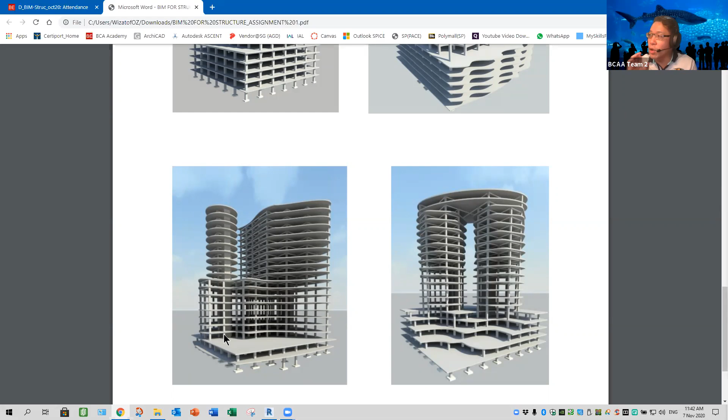Okay, like for this building itself, you can see that some might use the lift well or the lift core as a support for the structure. So you might need to think about this. So a lift wall itself could be RC wall all the way. So they need not have a column. So the wall can be thicker. So it depends. Take note what's the loading. So design-wise, you need to understand when to use RC, when to use a column, when to use this. It depends on the needs.

For this, I think there's not much. Just in between here, this is the lift wall. All right. Same thing. The darker area normally should be the lift wall. So if you are designing a column this way, you can see there's a platform, but nothing much there. I think there's also a number of openings. Yeah, because of the shadow.

Okay, so what should be our wall? 1 meter opening means this opening is a 1 meter structural opening. That means for a passenger lift, the minimum opening is 900. So they only give 50 mm allowance. All right. So 4 meter width, that means this is clear 2 meter, 2 meter, or it could be externally 2 meter.

Now here I will show how you're going to design this based on the drawing we have. So let's take a look. Okay, let's see where we can do this. 2 meter depth. All these dimensions should be the clear. So the wall is, create core wall 250. Yeah, so this is 250 thickness, right? Yes, okay, 250 thickness concrete wall. So it's RC wall all the way. So you can see that it partially takes support, full thickness.

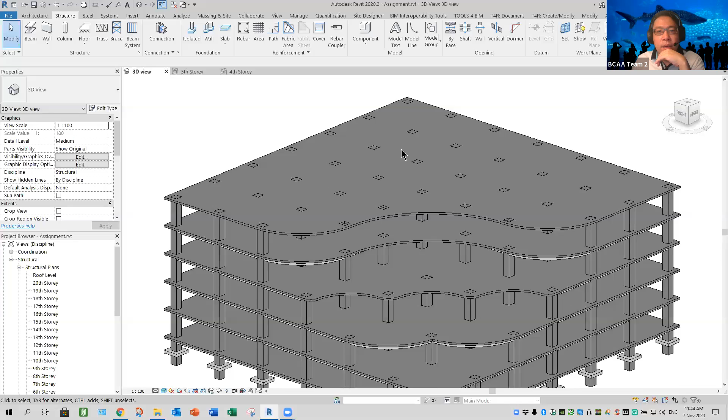Okay, so for this case, for my building, I might have 2 lifts here and 2 lifts here, all the way up the building. Of course, you need to plan what the design outcome is. You might not want to follow this shape, maybe at the ending part here. All right, I might do some adjustment later on.

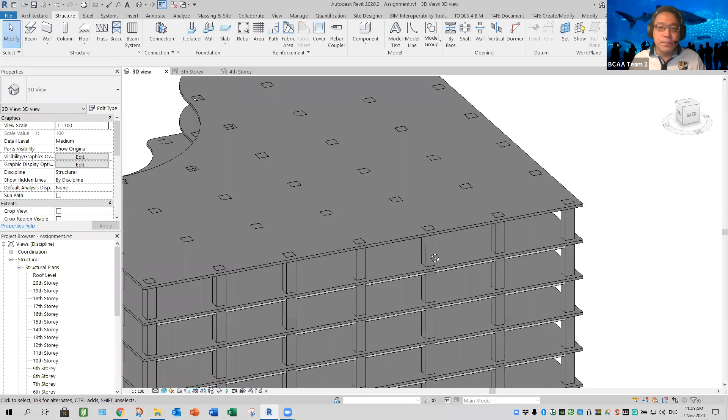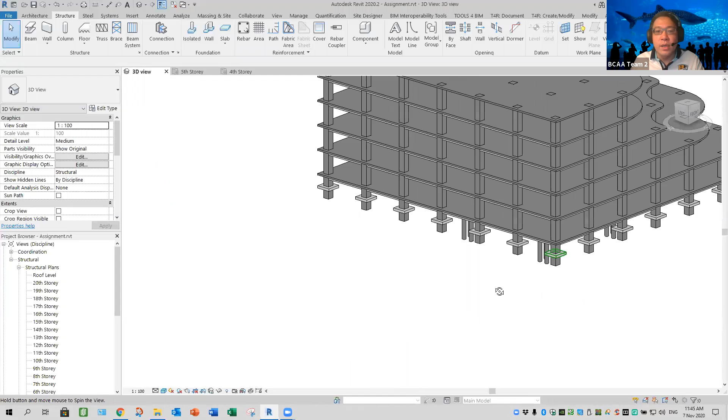So, let's say this is the front of my building, the main design. It means this profile here, you are showing something to people. Wow, nice building. So there might be a car park somewhere because we don't have a building here. So most likely there might be a goods lift somewhere here that travels from the first floor to the 20th.

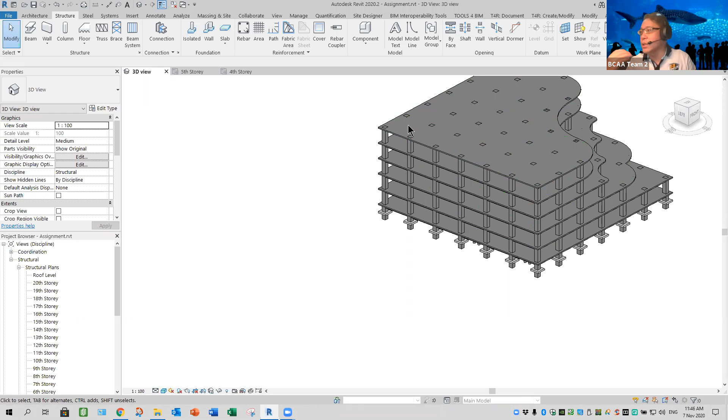Because in offices you've got to move your furniture, move your goods. So you can actually have one goods lift hidden somewhere with an opening, because normally these things are not so nice. They'll conceal or hide it somewhere. So you guys have to think how to design. Ideally, you should have the model come up first, then you start to plan where to place the lifts and so on. Meantime, I just want to create the lift, maybe also used as a goods lift for the podium here. So let's go to the first story.

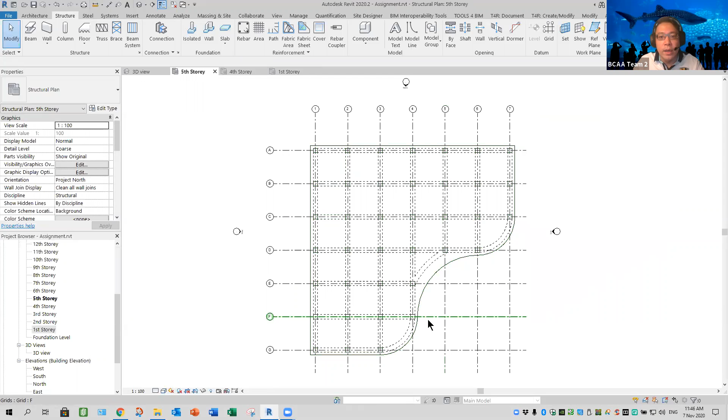Yeah. Okay. On the first story you might not see which direction. If I go to the fifth story, I roughly know where I am now. Ideally it's the sixth floor, which is the actual one. Okay. So I haven't changed anything yet. So my passenger lift or goods lift, maybe meantime I want it to be here.

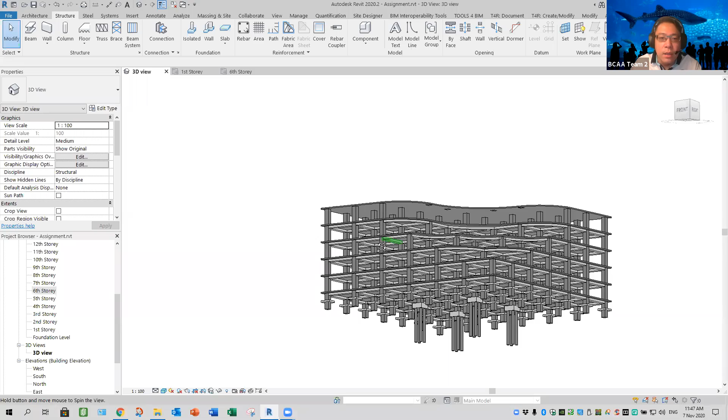Okay. So let's see, because we have 20 floors. What is our opening here? The so-called spaces here. Sixth floor, I don't see the beam underneath. Hold on. How come there's no beam? Haven't created it. Okay. Let me copy some beams from the fifth floor. Okay. Maybe how? Let me see. Nah, not like that.

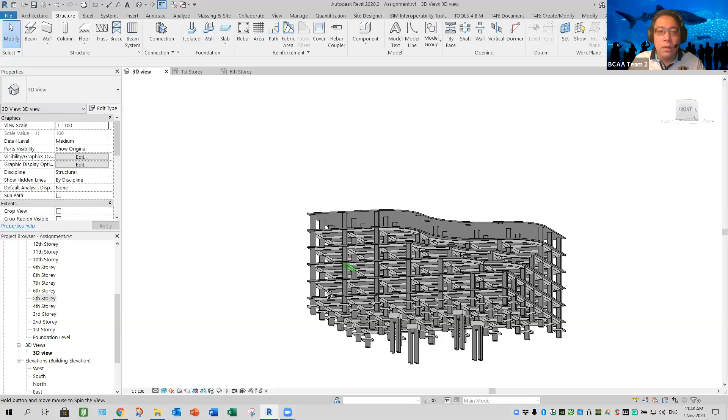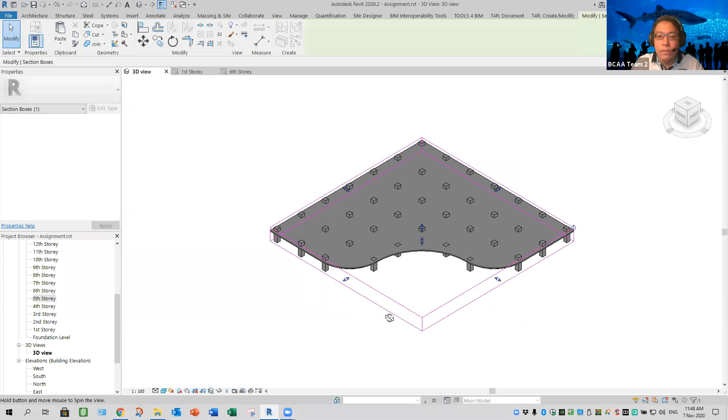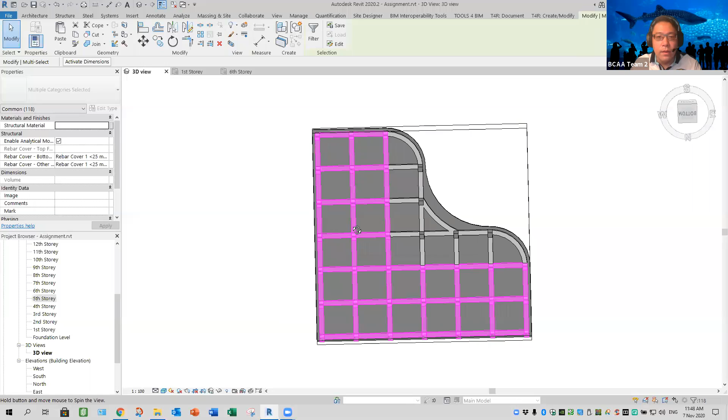Right click, orient to view, 5th story. Okay, like this. Okay, maybe something here. Control key, something here. Right? Then I need to unselect my column. I just want the beam. So copy, paste to 6th floor.

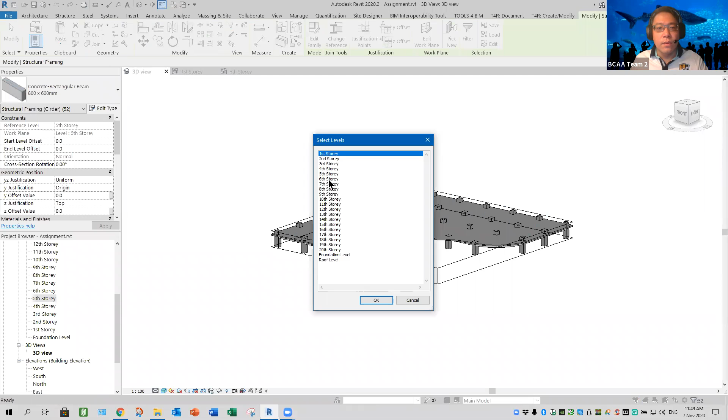Okay, it should be up there now. Clear my section box. You should have a beam on top now. Yep. So later I'll design this adjustment. Okay. So I have the 6th floor with beam. So let's go to 6th floor. Okay. I think we have our opening. Let's see.

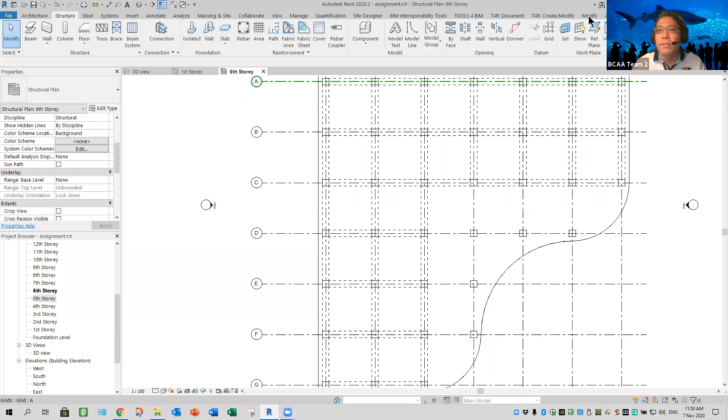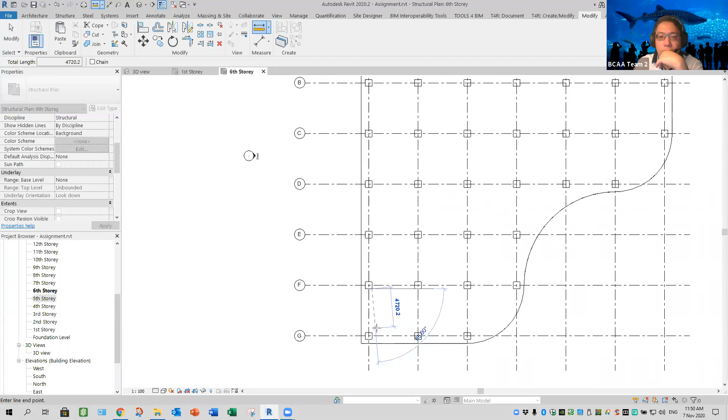Distance measurement modified. They want the opening 4 meters. So this one, we need to have 4 meters. We have 4.72. So big enough. Yeah, good. We need to have a staircase. So this is the staircase. This is my lift area.

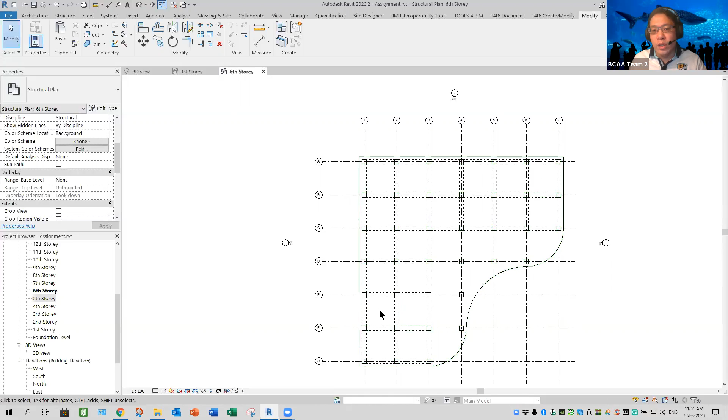Okay. Yeah. Staircases are normally at exits. So you should have one staircase here, one staircase here, one staircase here for emergency exit, let's say based on my design. So normally staircase and lift are quite close to one another, side by side. So I will build my passenger lift, maybe one passenger lift with, yeah, that one's up to you guys. This is just the building I'm planning. So let's do the opening first. I might change anytime because my whole building is not created yet.

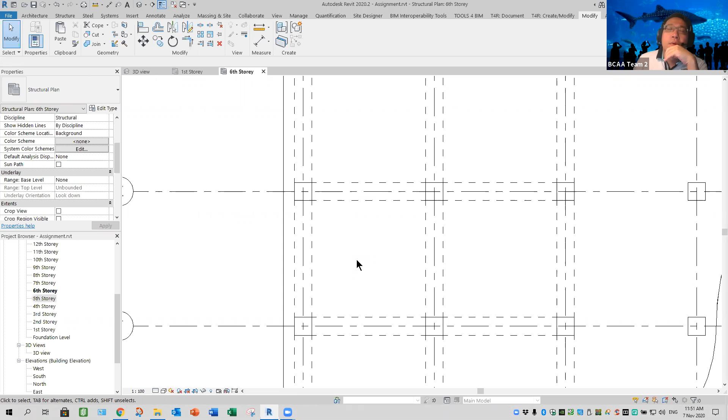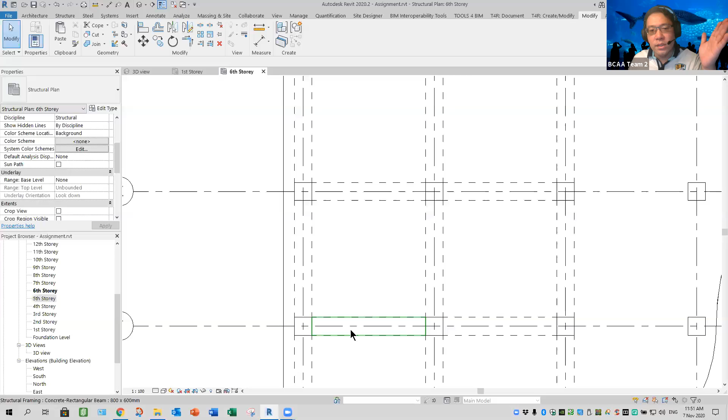Okay, they want 4 meters by 2 meters. So if your lift orientation is facing up this way, the lift core is important. That means my wall needs to be here, not just this. Ideally, it's flush. Why? If you draw your wall inside here, there will be air turbulence when the lift goes up and down. So ideally, you need to draw your structural wall sitting onto your beam.

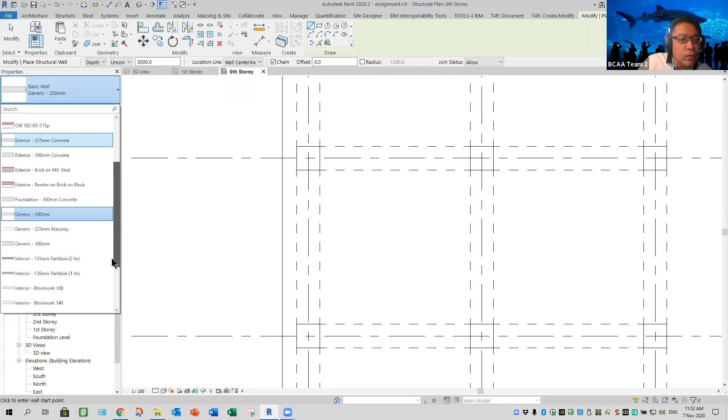Now, ready? If okay, I will start from the 6th floor. So I go to structural wall, and the wall thickness is 250. So let's see, do we have structural wall 250? I think we only have 200. Okay, so let's duplicate. So edit type, duplicate. Just call it structure wall, STR wall 250 mm, something like that. Yeah. Okay. So pick okay.

It's still interior function. It isn't exposed unless you want to set it as exterior, which is near the outside. Okay. Exterior structure, change this to 250. Yep. And okay.

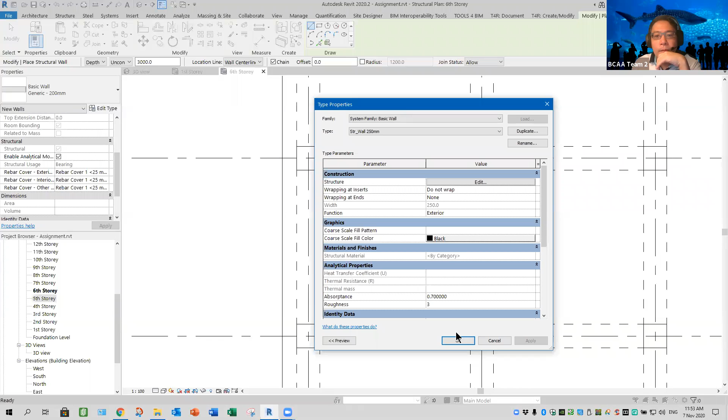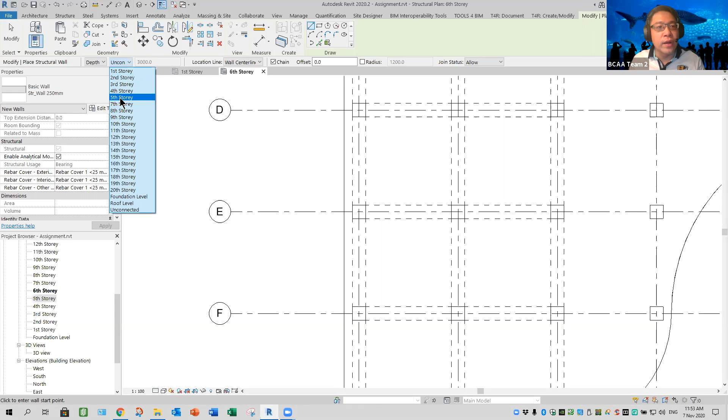Now, I'm going to draw on this. All right. Remember, structure wall: if you are at level 6, you are drawing it downward to level 5. I can see from here, it says that, right? So connected to 5, then we need not worry about the height. So click level 5, it clears. Now here, I don't want it to be at the center. It should be at the corner. That means core face exterior or core face interior.

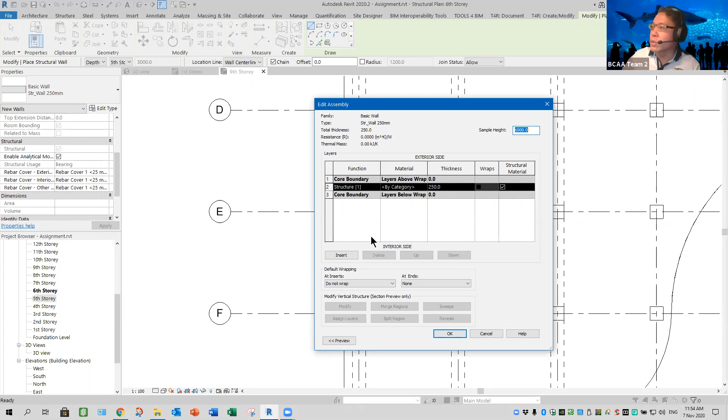When you learn architectural wall and structural wall, right, you go to edit type. You'll notice that if you do design, this is the exterior side, this is the interior side. So when you draw an architectural building, interior wall means your plain, thinner plaster. Outside, thicker plaster, thicker painting, because it's exposed to nature, exterior, rain, all these things. So a lot of different coating is there, weatherproof paint and so on.

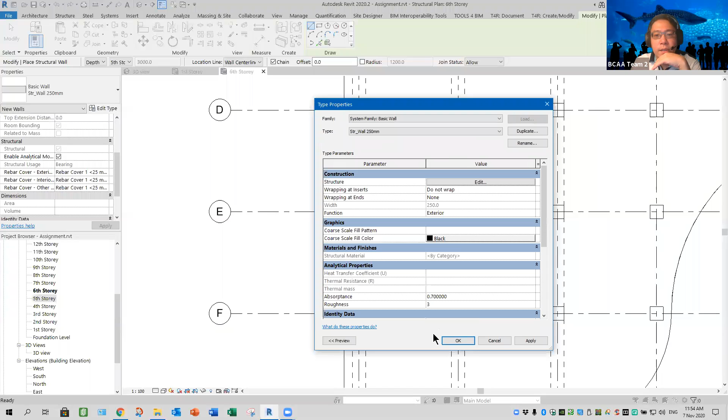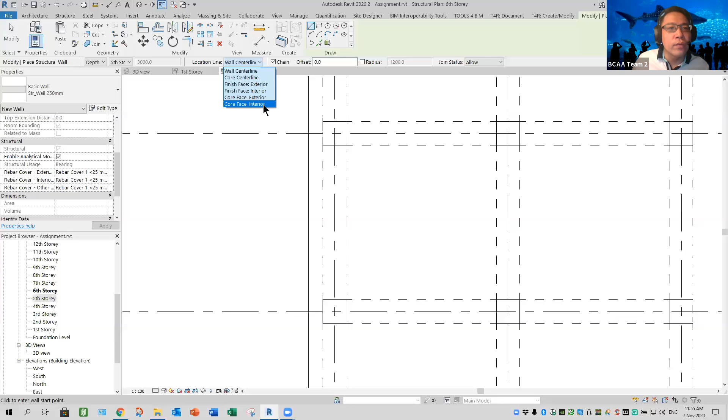So that's why you've got to understand. All right, but this is still structure, so everything is still raw finish. So I don't really care much about them yet. Okay, so select this. Then I'm going to draw this wall. Okay, everything set up. This wall, one. Oops, center, I don't want. Wall, core face interior. Yeah, like that. One here, then one here, and one here. Now I temporarily draw first because I need to check and see what the design is like.

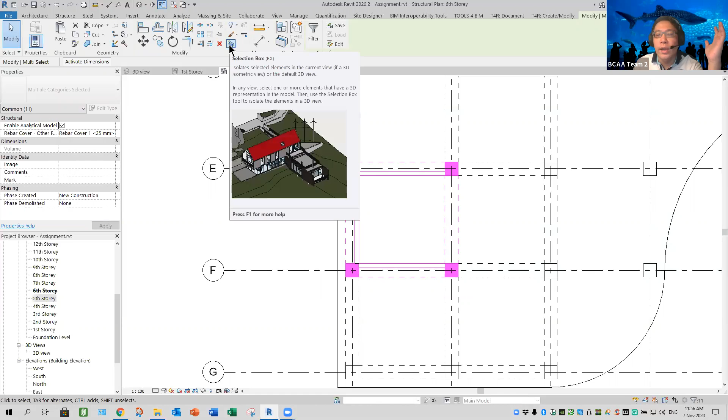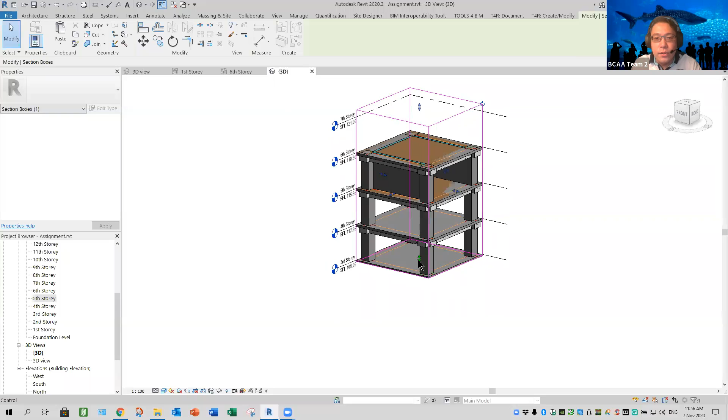So modify. Now, by drawing this, it's quite difficult to check again. So as I said before, right, you window what needs to be selected to be shown. Go to your selection box. It'll show you the 3D view now like this. So from here, at least this is cleaner in the sense that you know where you are cutting, where you are punching the hole. So the focus is only on that area. So it's good to have it up to here, basement.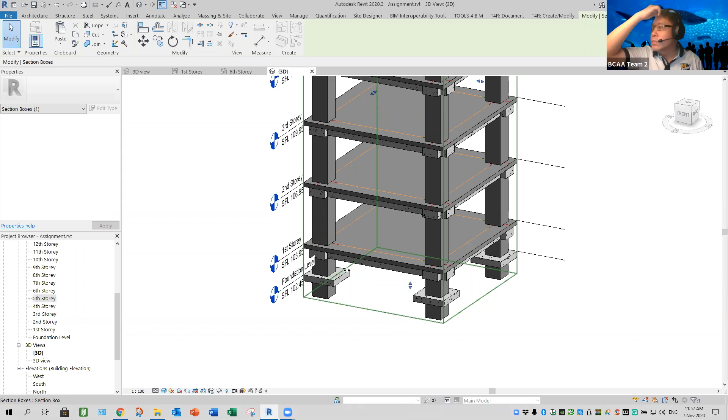Now, basement is important in a way that if you have a high-rise building, normally details like your structural pit here, how deep further down, you need to base on the lift specialist requirement, because that's what's called the lift pit. You need to put a buffer. Normally for high-speed passenger lifts it's an oil buffer, hydraulic. The rest is like hydraulic, but it's air. Normally you have one, two or four, depending on the loading. So it stops the lift when it's going down, so you don't crash. So lifts have a lot of safety features.

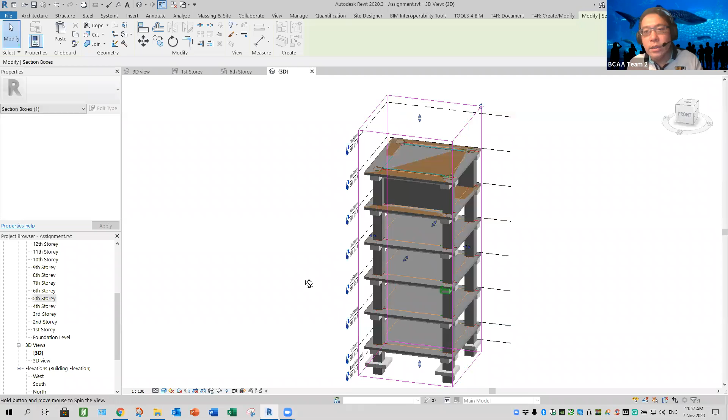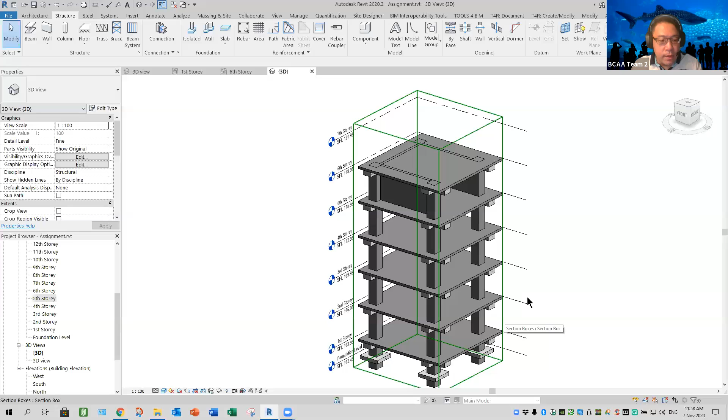So I want to see my building like this. So your view should be something like that. Okay, slight adjustment. Important thing is it's clear of your building, easier. So when I do design work, I like to view my model this way. You see all these flashing things because, as I mentioned in the first lesson, the analytical line is shown. Off it, your graphics will look better. But some of them you may want to cut in first to show something. Okay, closer. I need to clarify this.

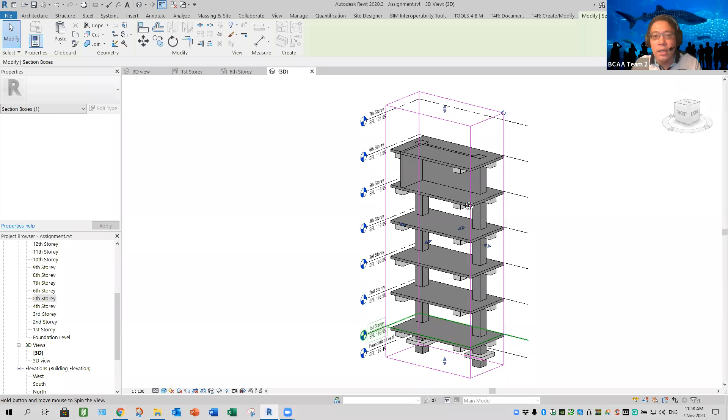So change your shading mode, not to shaded, to consistent colors. So you can see the color here. See, there's no line, meaning your wall and your beam are overlapping, which should not be. When you do structure, you see I have a line here, and I should have a line here. Here I have, or don't have.

All right? Yes, Hui Hao, want to say something? No, no, no.

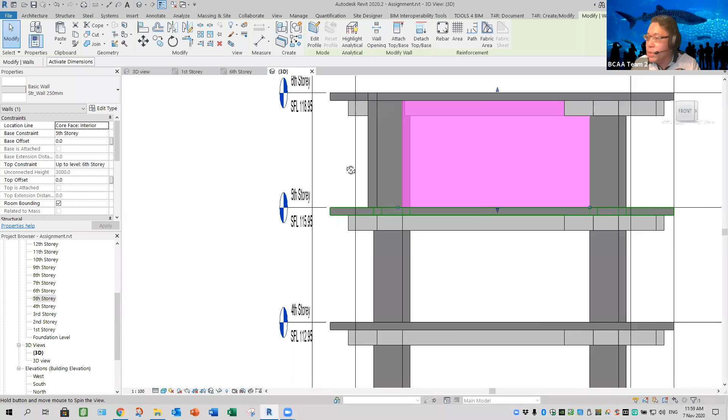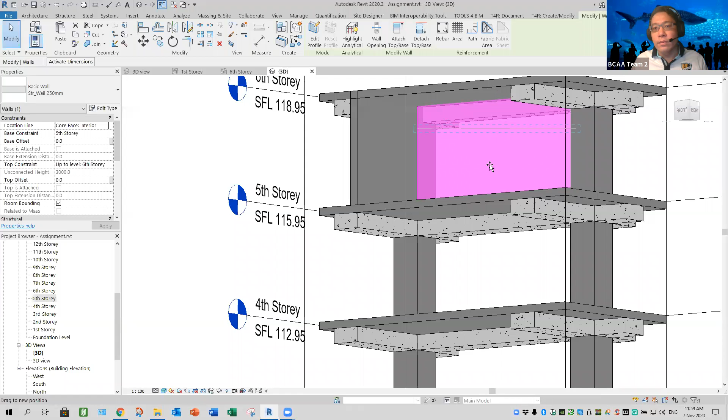Oh, okay. So when you select your wall, you see that my wall is overlapping my beam, when my wall should be below the beam. And you see that this is a structural wall. When you overlap, they automatically merge into your beam. See that? Which is wrong. Logically, the wall should be underneath the beam, not joined together. So what is this height here? Very simple. You drag downward. You see the beam will restore back. And from here, you can drag this, fidget until it touches the underside. This is one method. If you don't touch, observe the color.

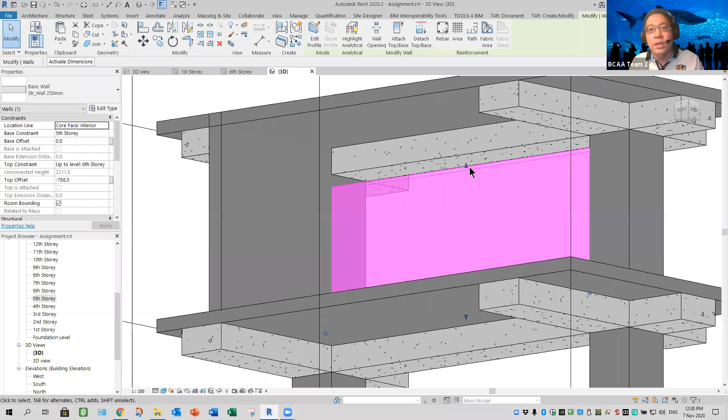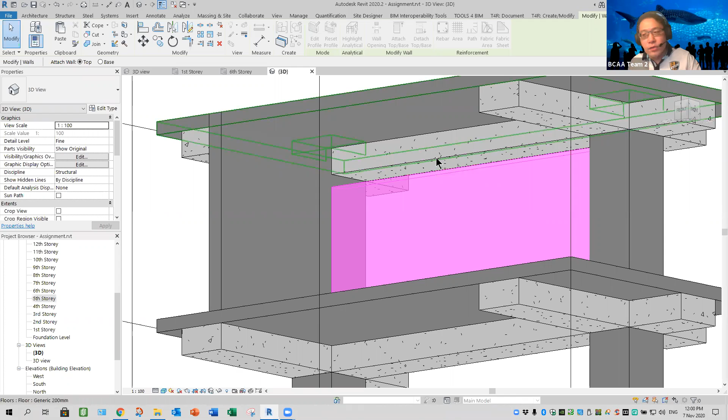The other method, yes, you can try, but I don't know whether it works or not. Let me try, because so far I never used the attach tools. See, attach. Can I select the beam? It doesn't. Instead, it's a slab. See, cannot. Okay, this is for those major parts. So beam is not.

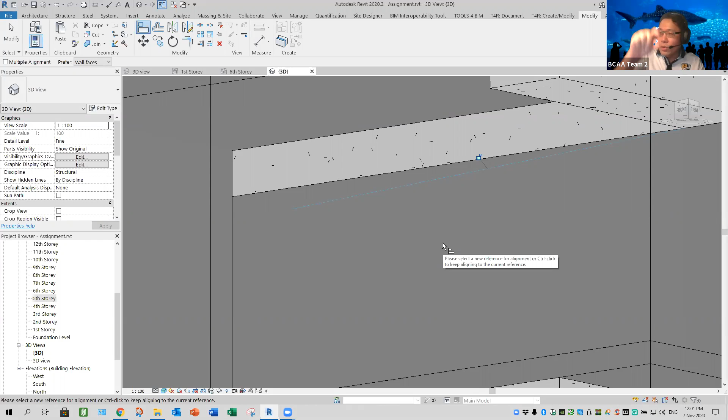So for this case, you want to use align, where this is your reference. You zoom in, reference the face, remember. So when you highlight, make sure you highlight the correct face. See, the underside of the beam and this slab here. See now, it works. So if you don't want to use align, there's an arrow, you fidget until it touches the underside of your beam, you highlight, let go. So two ways. Safer, you can use alignment. You won't go wrong. So this is correct now.

Outside here, I think, should be okay. But it doesn't show the connection line. Why? There's a reason. You learn Revit Archi, your wall has a connecting joint, which is allowed. When two walls are together side by side, they do the cleanup.

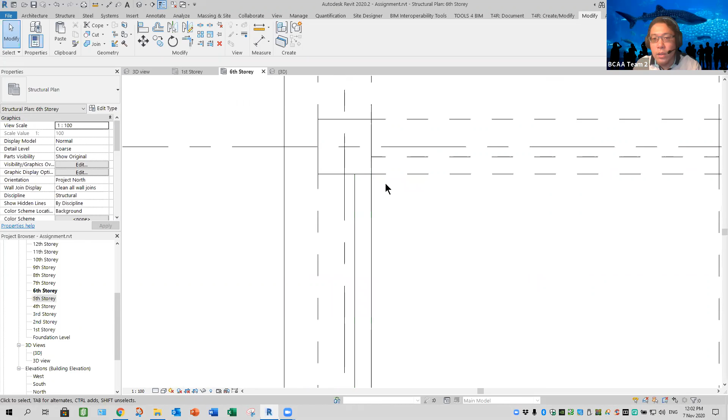See, now if you draw correctly, it should be a hidden line because it's on the 5th story, but here it's not. And you can see that my wall is overlapping. See that? That's why you don't see the connecting line. So for this particular design, you need to select your wall and, remember, point at the grip, right click. I want you guys to select disallow join.

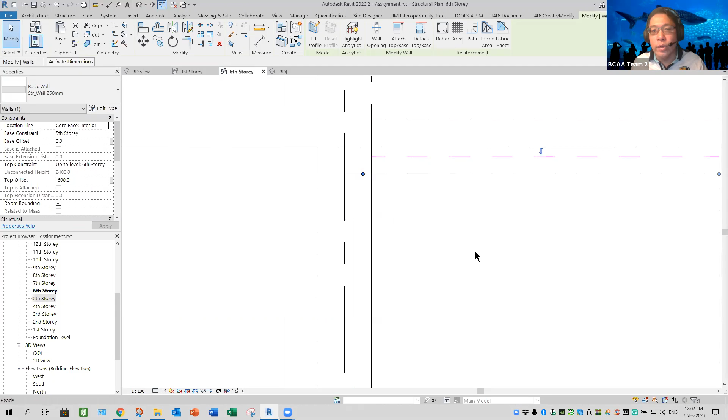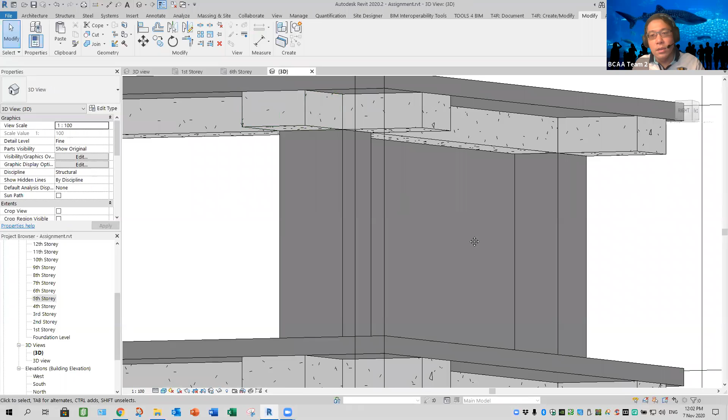Once you do that, you notice that your wall, you can adjust the connection properly, and you go to your 3D now, you should be able to see the clear line because of the auto cleanup in the wall function. Although yes, it might not be an archi wall, it's a structural wall, but the feature is still there.

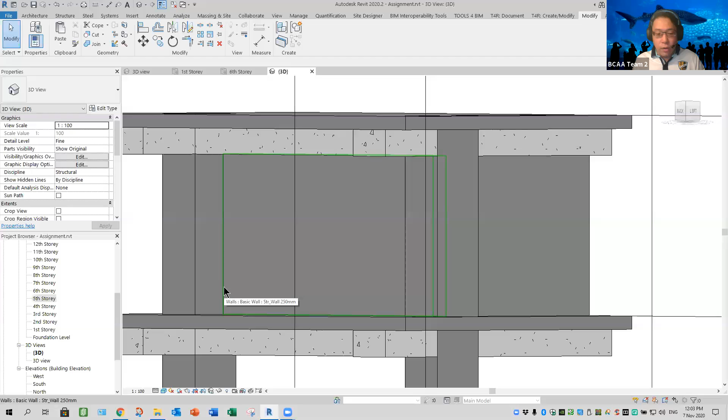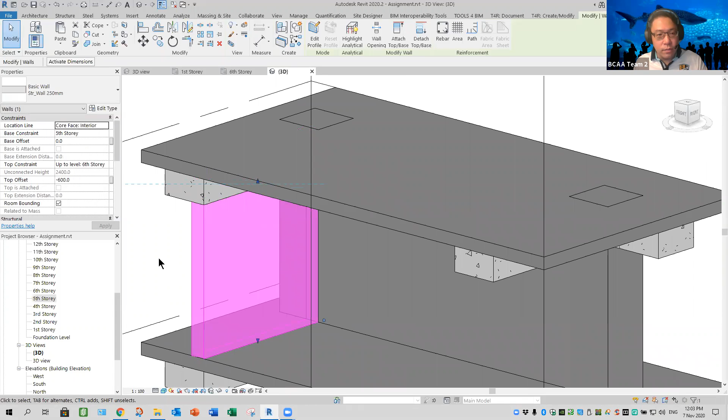So when you do modeling, especially construction, all lines must display, meaning it shows the joint stops there. Not like just now, one glance can tell that it's overlapping. So you need to change the behavior. See this? Same thing for this particular wall. Drag further down. See, it touches. See my beam? The green color, let go. See? Automatically now. All the lines are clearly shown.

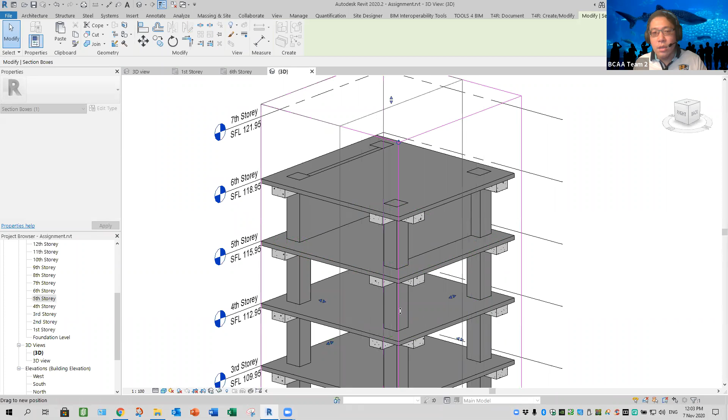So this part is done already. Let's adjust the other side. Do your structure, don't rush. Make sure it's nicely, properly set up, then slowly do the other side. Because if you want accuracy, we need to take care that the model is done nicely. So this one joins okay, right? But this one, see the joint? Only archi wall design is nice like that, but not structure. So here, outside is okay, inside is not.

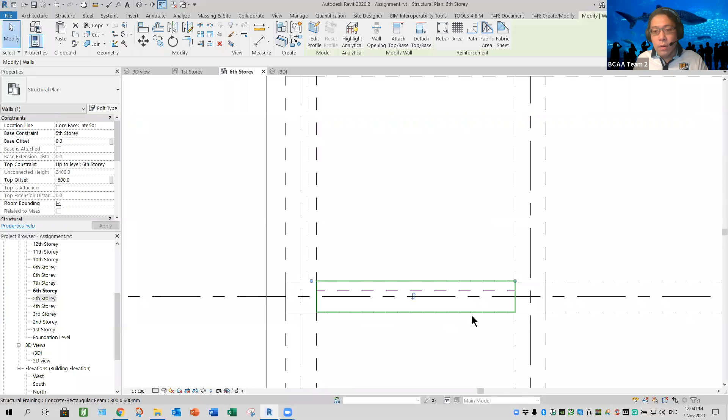Okay, so select, use the shape handle, adjust. See the green color beam line, let go. So you guys have got to be observant. But here it still shows the join, right? Which I don't want to let join. So how? Go back to my 6th floor. Select the wall. Oops, hold on. The wall. See, this still joins. Point, right click. See, disallow join.

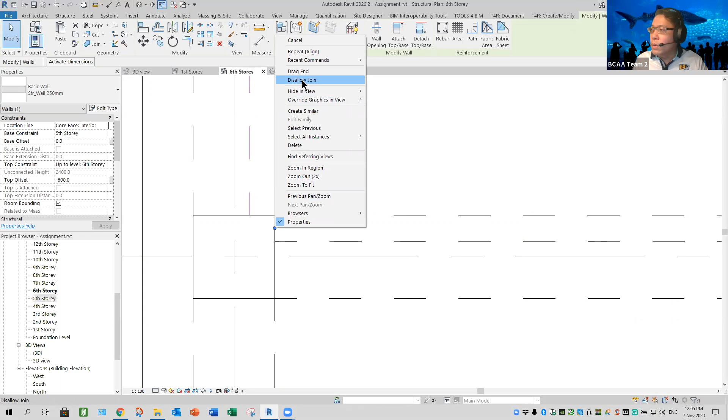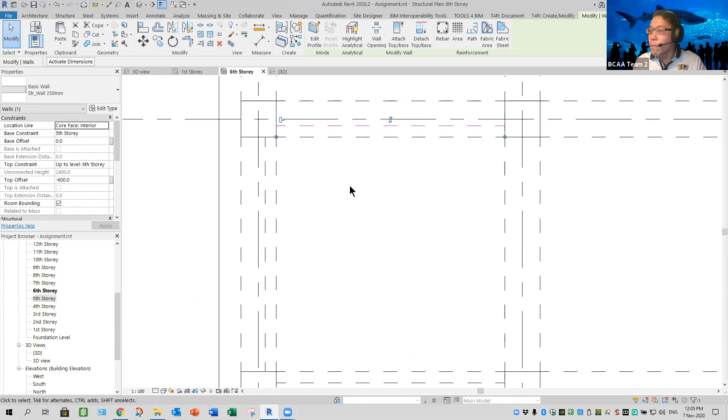Select, drag it. Because when some extra component appears, the volume will be wrong, because your QS needs to calculate how much cement is used if you do costing. So as a modeler, you've got to be careful when you do design like that. You need to understand every component you draw, anything connected or extra.

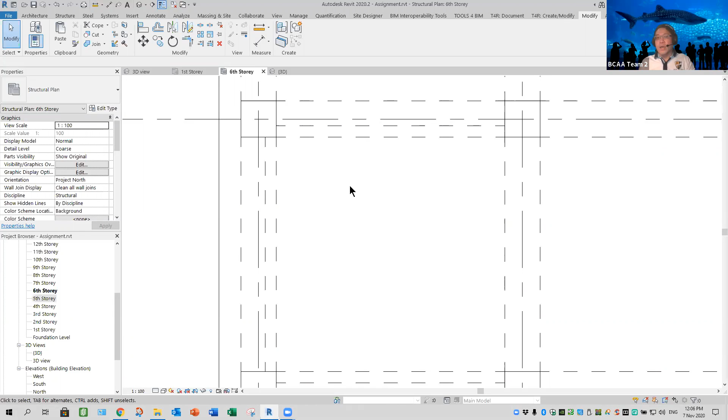Because as I said before, the very first day, when you do BIM modeling, or be a BIM modeler, you don't just do it for the sake of modeling. Think how many people are involved, a lot of people. So the design must be set correctly. That's the purpose of BIM. If you draw anyhow and don't care about others, then there's no meaning going for BIM, because it defeats the purpose. So a lot of things to take care of, to take notes.

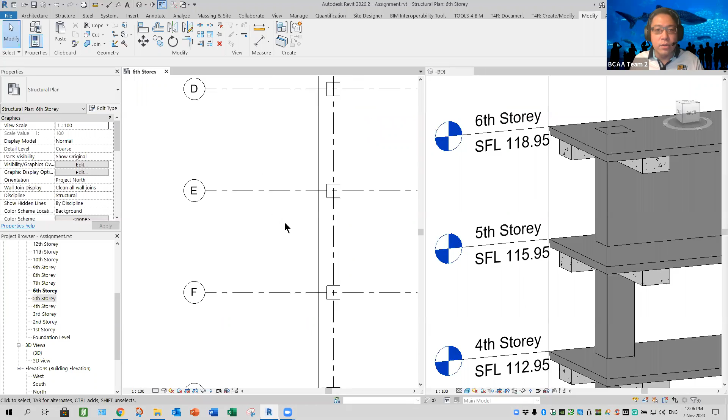So first story, close first. So this is my 3D model. If your design work is like this, make sure it's okay. What happened to this part here that joins? I thought I cleared that. Hold on. Done really, eh? It's done also. It's funny, eh? See the line? It auto cleans up. The more you worry and don't want them to join, the more they clean up nicely.

So this is around 5.2 meters, I believe. We need only 4. So how? It means you need to have one beam across to support this, unless your slab is structural. So you need to have at least a beam which is the same size as your wall or thicker. It should be slightly thicker. So for this case, I will try 4 meters. That means here to here, 1.2 meters.

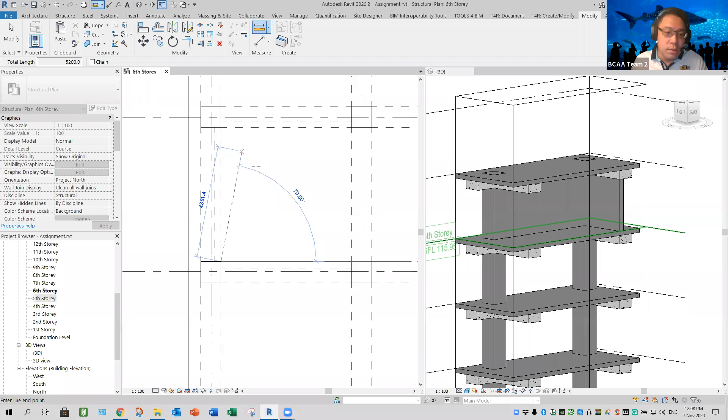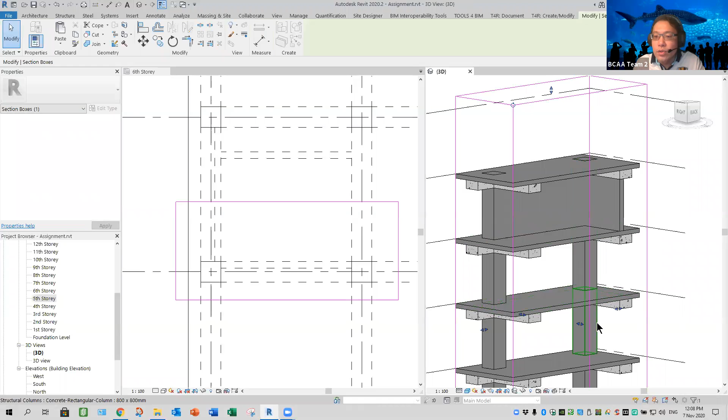So my wall, this one, I've got to move. Correct? Yeah. 1200. Okay? Yeah, like that. Because they want you to create a 4-meter opening. So it should be like this. All right. So this one can be a small storeroom.

Maybe for your riser, like electrical riser, TV riser, console, whatever. Because it's easier when they're connected to here. So maybe to have some access room here. That's for later, during archi design. But for structure, this is what I want.

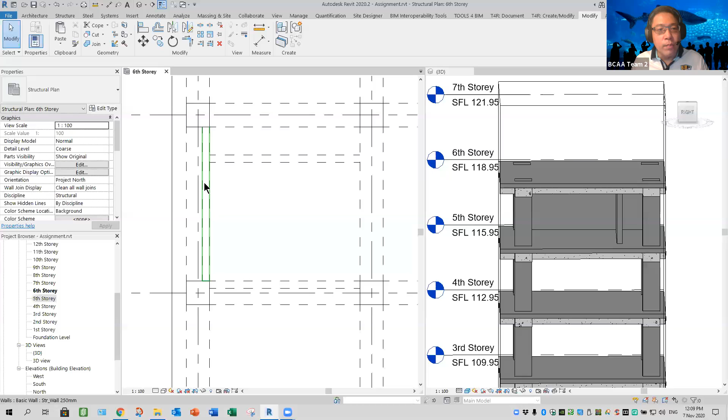About the 2 meters, copy one wall here, and copy to a point, 2 meters. Or let's say 2 meters, is it possible? So small only. I don't think so. Hold on. Measure this. Nope. Move another 250.

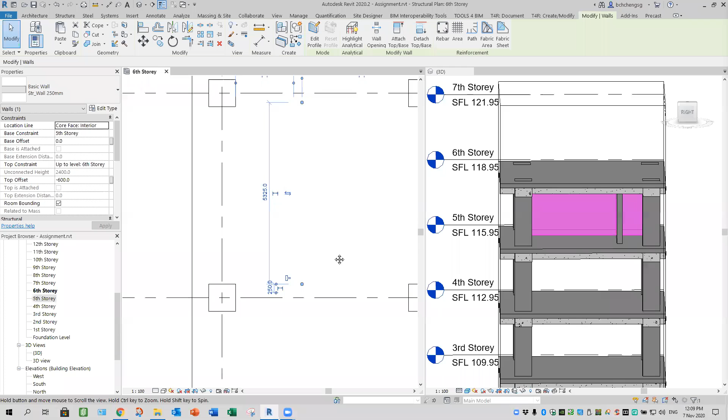Okay, so it should be like this. These two walls you can clean up. Your beam, you must have a beam here, and so does a beam here across. For this particular design, it can be a smaller beam. So cleans up like this.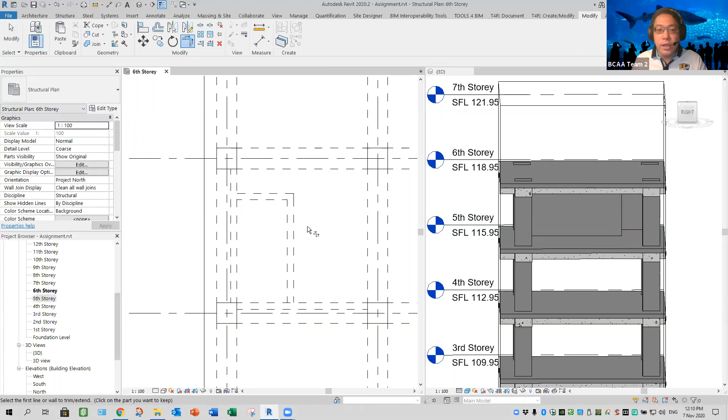Just as I say, you must do one first to determine. Actually, for this wall, I would say that you can do it in the center as an air vent for every floor. So at least it's easier that way. Because if you really flush it in a certain way, there's some compression, no place to escape. So ideally, every floor there's an opening for the structure.

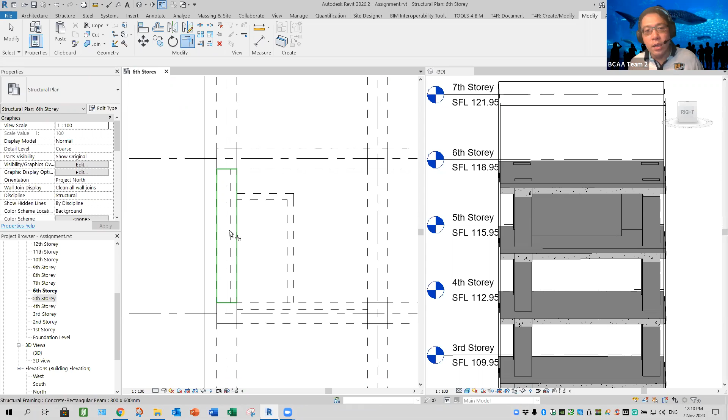Then, as I said, passenger and fire lift, so there should be a wall in between, 250. I don't know how big this lift is going to be, but I think it's quite a small lift. Maybe it can take up to 6, 7, or 8 people per lift, I would say.

Or you want to create one bigger, one smaller, it means the width wider. It's up to you, there's no wrong answer. Important thing is when fire starts, how to clear people. That one I can leave it to you guys. You want to follow the notes, it's fine. It's just that I want you guys to learn something extra, that's all.

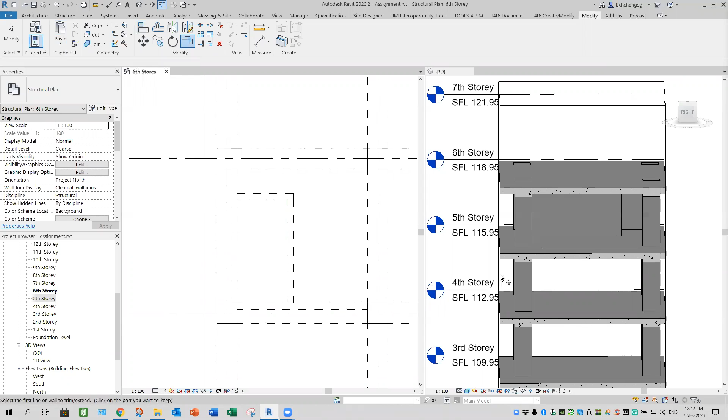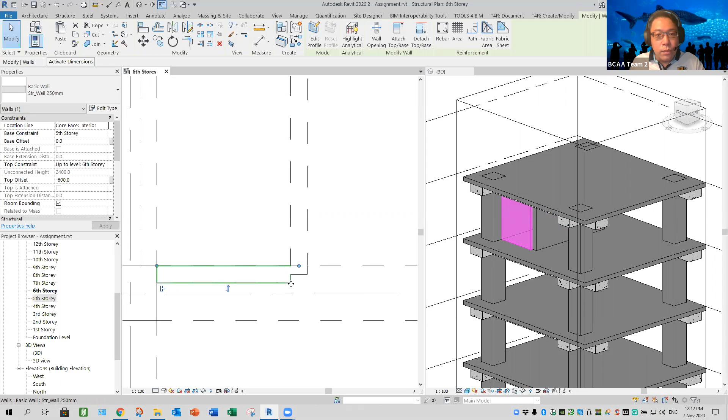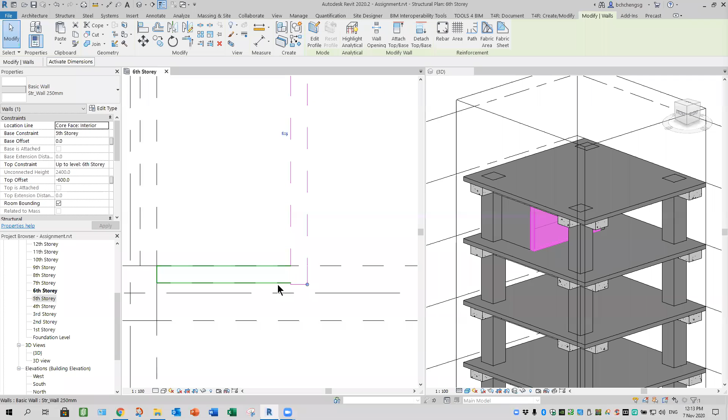Facing. No. Very weird, huh?

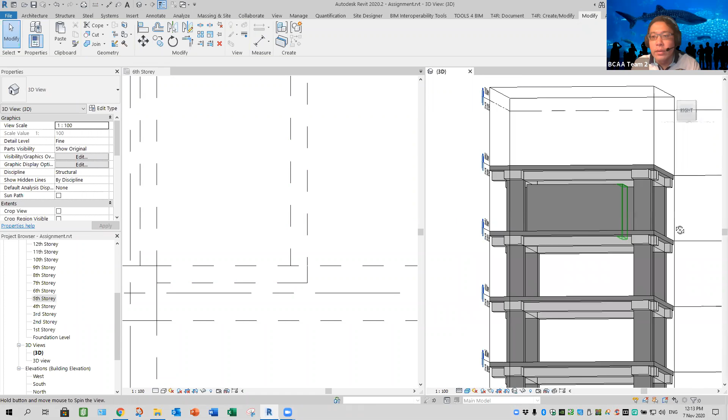Okay, as long as it cleans up nicely, it should look like this. So this is how your lift well design looks. And you see that on top there's a gap, see now? So a lot of things you need to consider, because the wall is underneath there. So think about how you want to design it. Touches the beam, touches the wall, it's different. See here, one big opening.

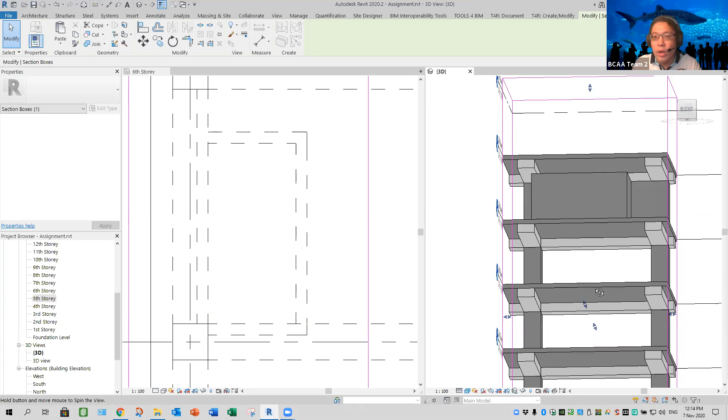So when you do it, don't blindly do it. Understand, right? The requirement here. See, how to clear for this case? Anyone? Guys, how to clear that if you have something like this? How to rectify the empty space here?

Before I let you guys go, anyone? Voice out. Which space? You see there's an opening gap here, this wall, look at it. I think, right, it should have a beam across. I should have a beam, right? Attach to base, so you need to have a beam. See now? So you have a beam for every floor here to cover this space.

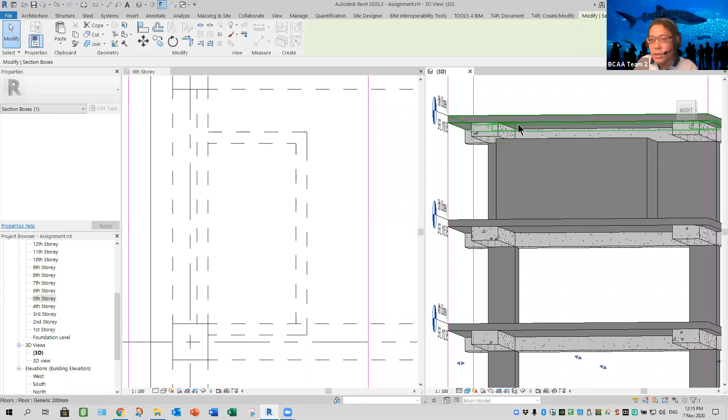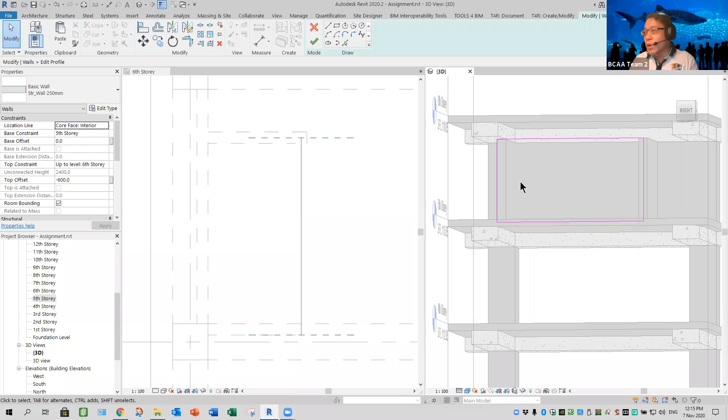But here, because we need the beam support below, as I mentioned, you don't need to worry about that. When you draw a beam across, you automatically cover it, like what I'm going to show you. Let's say beam, I want 300, or maybe 250 by depth here, 600. So should be the same. So final piece, structure, beam.

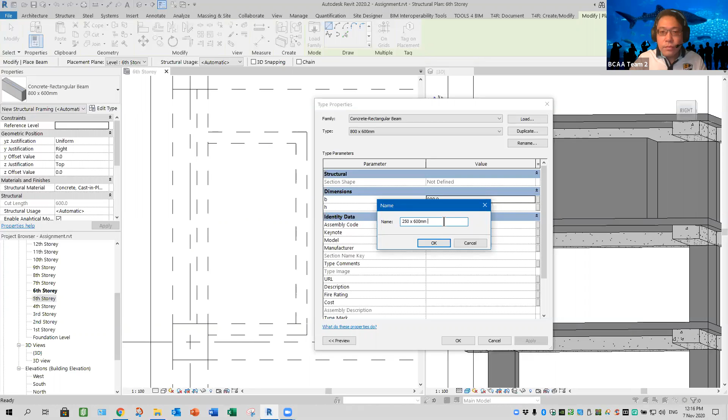Okay, I'm going to select one of them, edit, duplicate, 250 by 600. Then you change this to 250. Okay, now you draw your beam where? Here.

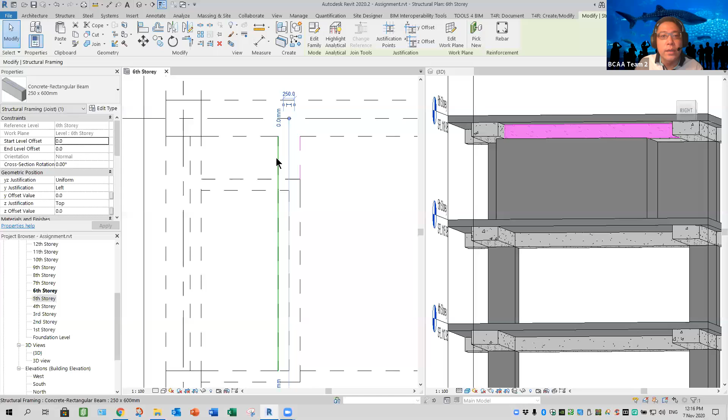Here, line to line. Oops, wrong space. Let me just do the mirror. Pick axis here. All right, this one I delete. Okay, so it should look like this. See this? Okay, so when you finish one level, the rest will be the same.

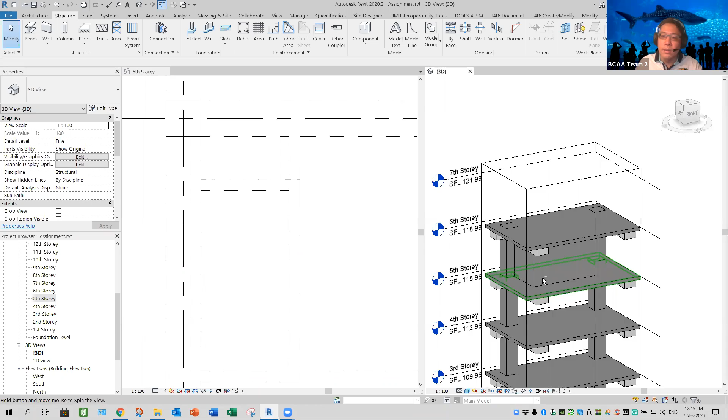Questions? Try to get it adjusted. So next week, right, we'll talk about other stuff, columns, stairs and ramps, and maybe come back here again. Okay, so today's recording, I'll stop up to here. Any questions? If not, then class ended.